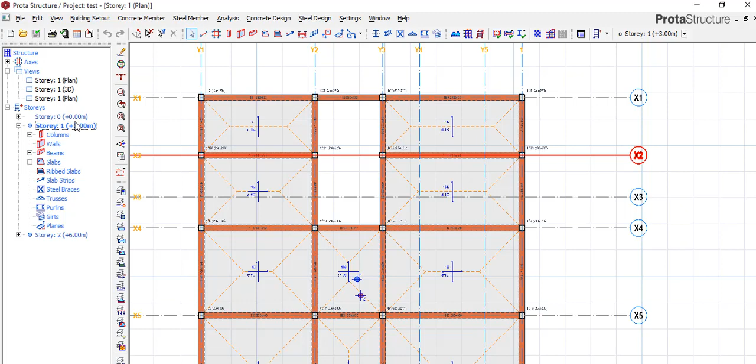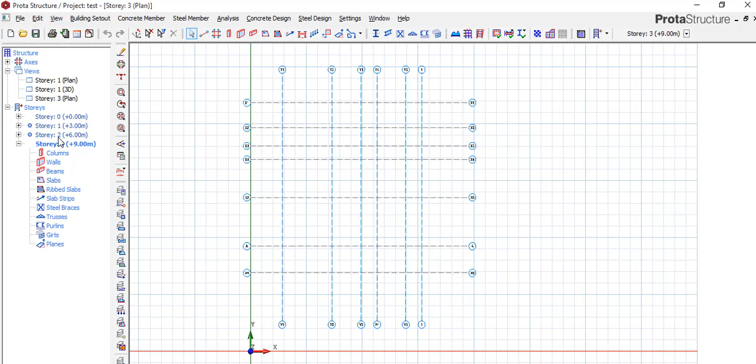So what do you do? Let's assume the floors are not typical. So what you do is, first of all, insert the number of stories. Let's assume we have three stories. Okay, we say yes. Presently you have this, and this other floor. Let's assume this is the floor that is not typical. So the first thing you need to do is to get your axis lines. Get all your axis lines.

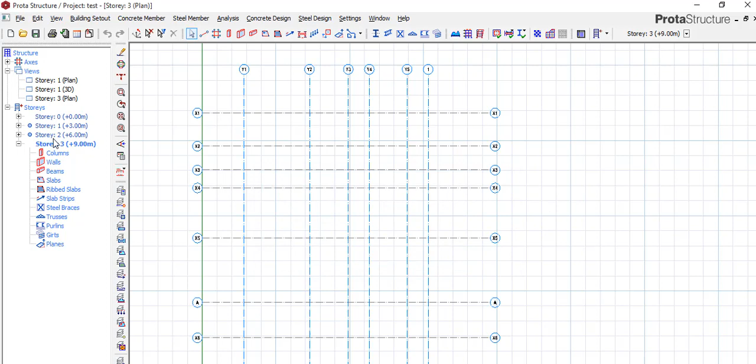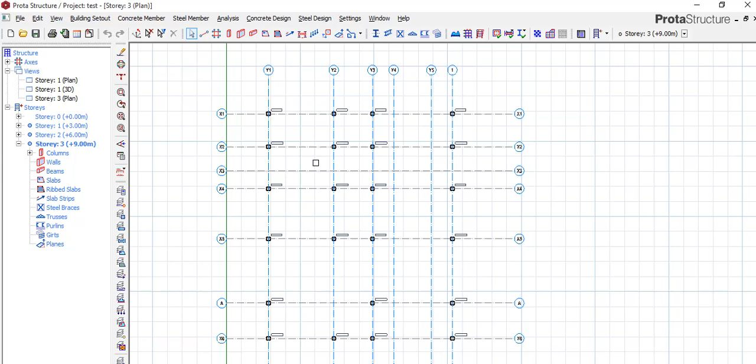So on the next floor, generate. Okay, go generate your story. We are generating it here, so we are taking out our slabs. We could take out our slab, we could take out our wall and leave our columns. So with this, let's assume this is the column. It all depends on what you want to do, and let's assume this column is no longer there.

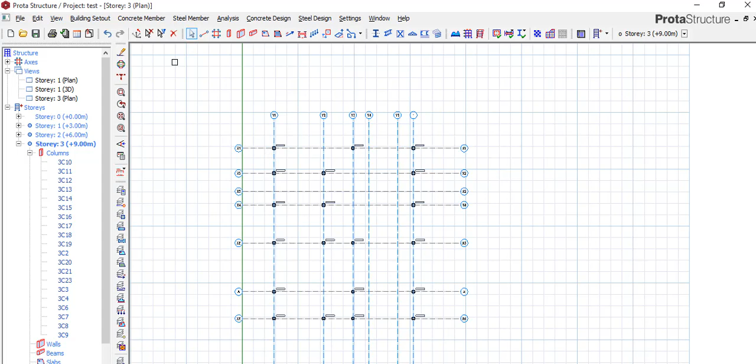So look at the architectural drawing that you have, and you've created your beams, your column and your slab position. Still follow that pattern. Same thing, get your beams. After your column, the next thing you need to get is your beams. Same procedure, but follow what you've done for the floor that is not typical.

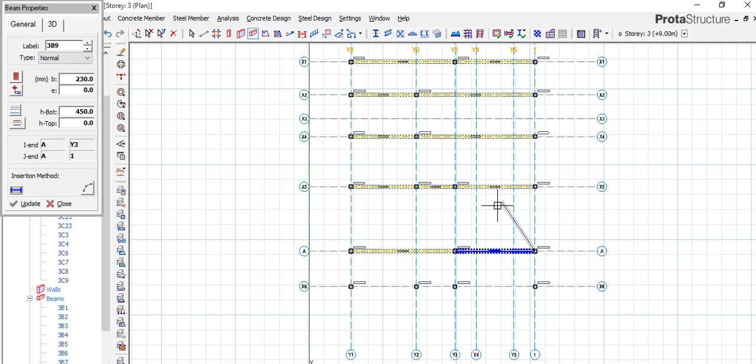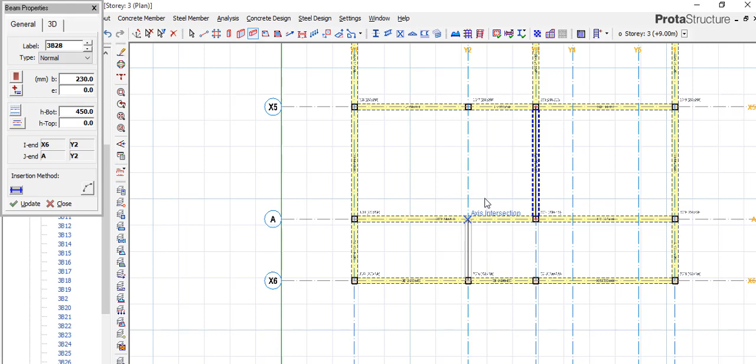Now you can't generate it automatically. You have to do each of the floors manually, since they are not typical. So you can't easily just run your generate floors as the same. So this is what you do. Follow it the way it is. If it's not typical, follow that same procedure, instead of just generating it.

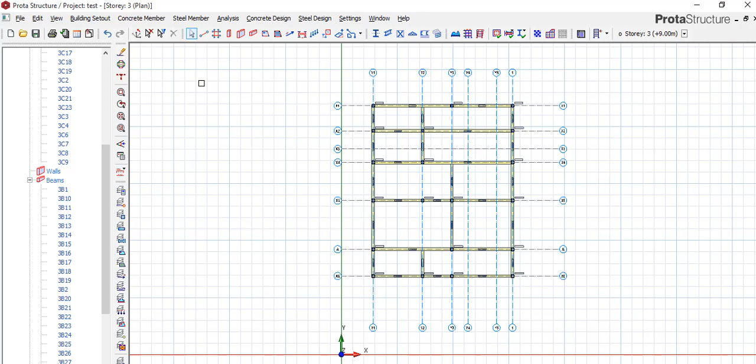It's an assumption, but whatever it is, if the next floor is not typical, you just need to get your grid lines, generate your columns, then start introducing your beams and your slab and whatever you have to introduce. So with that, you can design any of your floor slabs. David, I hope this answers your question, but if not, please let us know in the comments section.

So let's assume you have 3 floors that are not typical. If you check our other videos, we've done how to import from AutoCAD, but where the floors are not typical, you can only import the first floor. You can't import the other floors. You import your first floor, and from your first floor generate the columns, the slab, the beams, and you keep generating the grid lines on other floors. Introduce the columns first before the beams, before your slab.

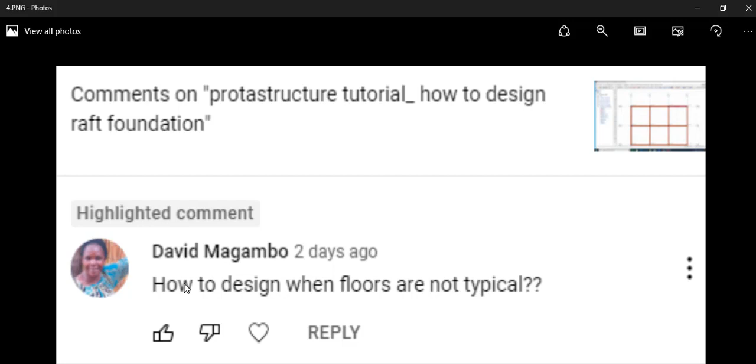So whatever it is, follow the pattern of your architectural drawing on that floor. So you do it manually. You can't just import, or you can't just generate automatically. So that's what you will do. I hope this answers your question, but if not, please let us know in the comment section.